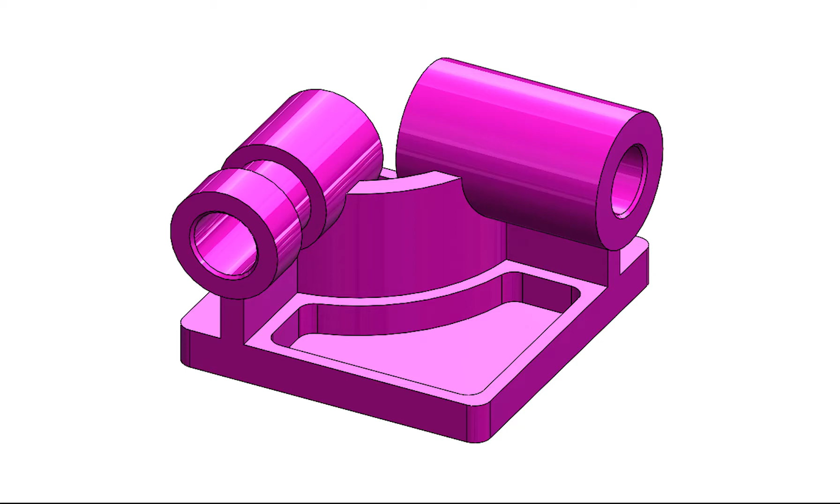Today we are going to make this part. This part is a SolidWorks CSWA exam file part. Let's try to make it and learn how to make it.

This is simply 213 from here and 200 from here. This main plate is 200 and 213, and let's start with the main plate. File new, on the top plane I will make a rectangle, center rectangle. Let's give it a dimension.

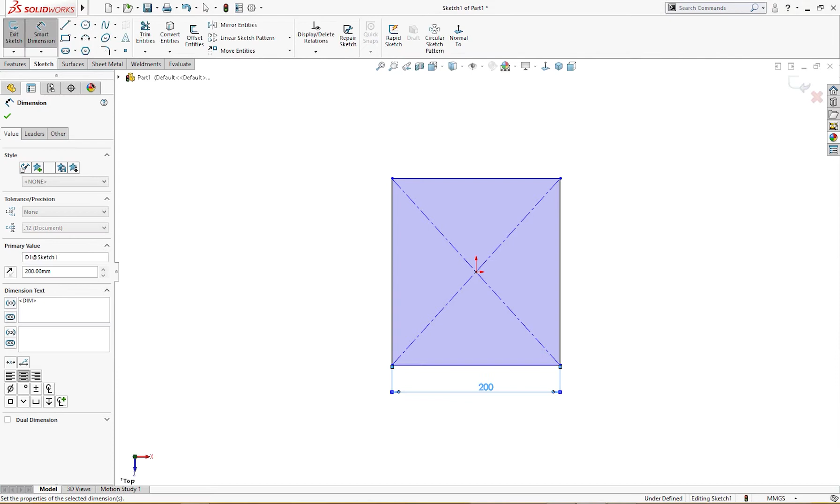The dimension is 200 and 213. 200 and 213. Extrusion is 25mm. Let's extrude it up to 25mm.

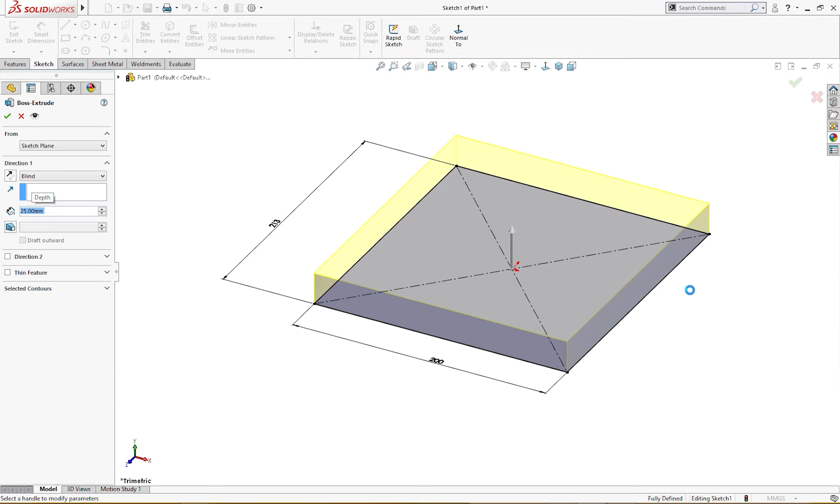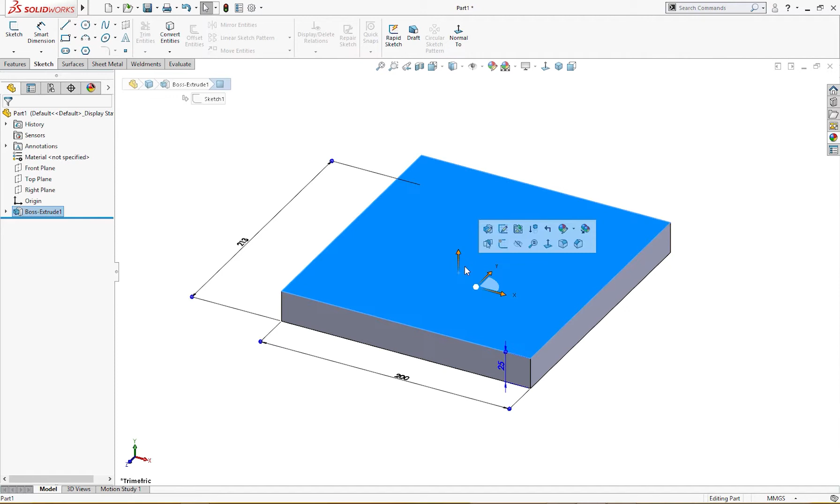Now let me remove this color first, and also the real view. It makes problem to see clearly. So now let's draw some sketch over here.

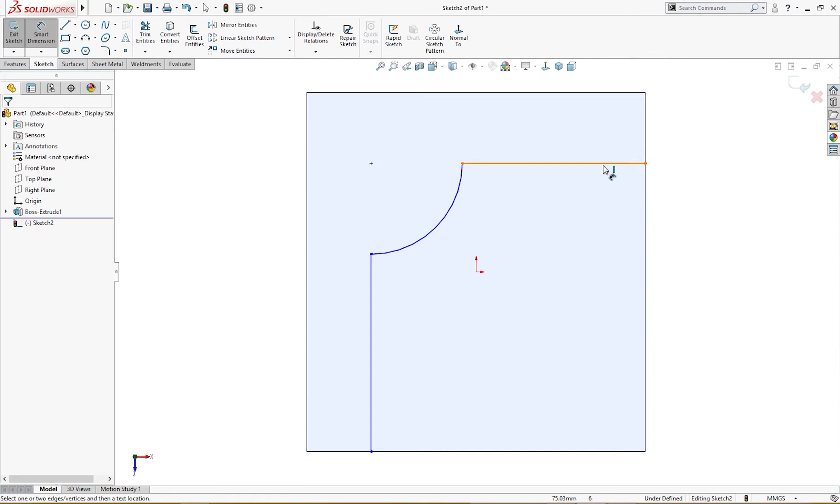I will draw a line from here and it will convert into an arc, and then I will go back there. Let's give it a dimension of 80mm and 80mm. This is 170.

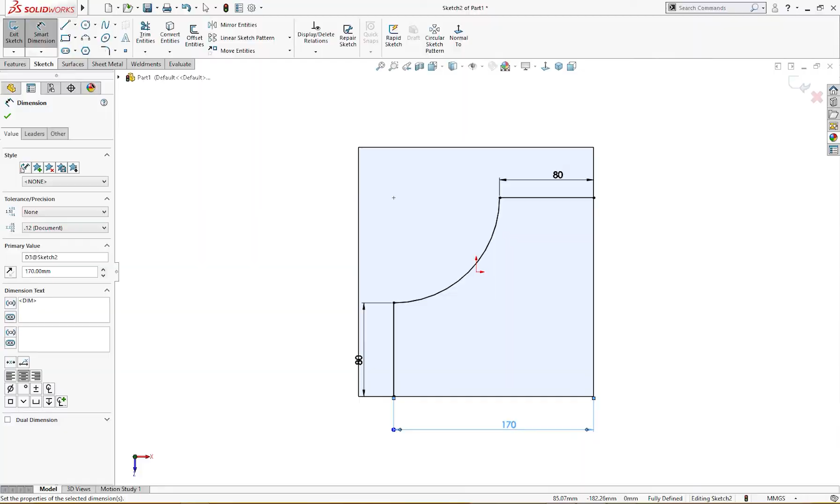The sketch is fully defined. Let's check. This is 170 and 170 from here.

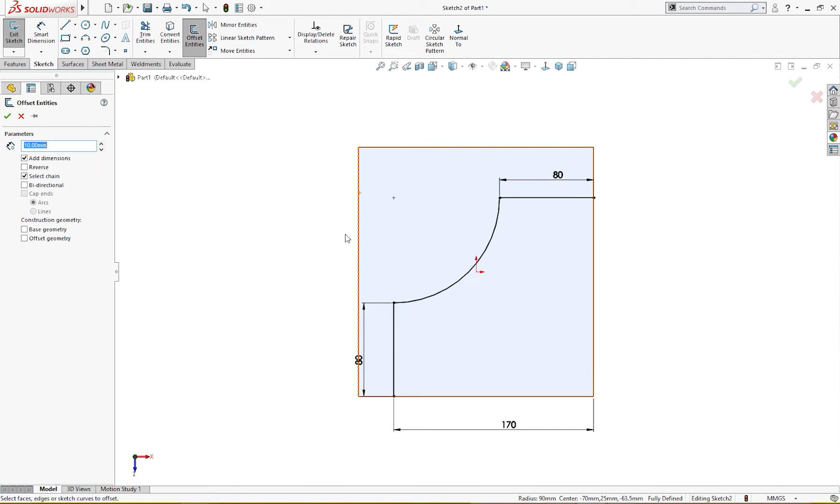I'll offset it 15mm offset. Let's offset it. Let's offset it. Offset 15mm. This is the right side.

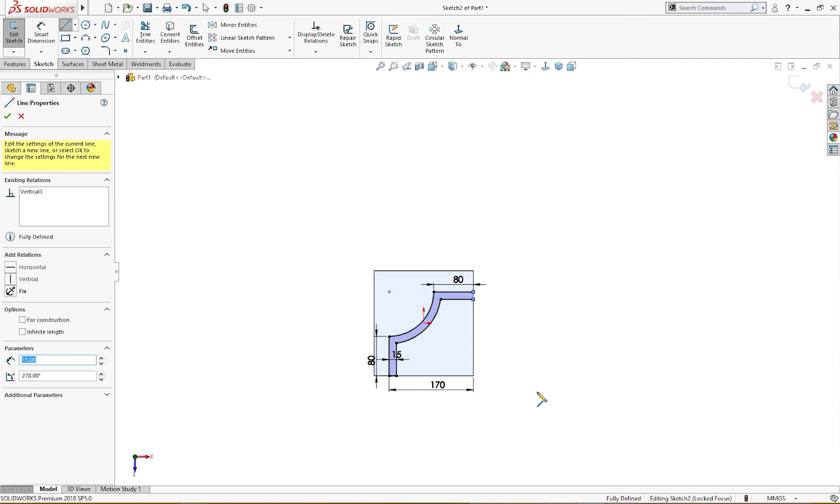Okay, let me close the boundaries from here to here and from here to here. This is defined. I will leave it like that. I won't extrude it because I know there are some changes in the future.

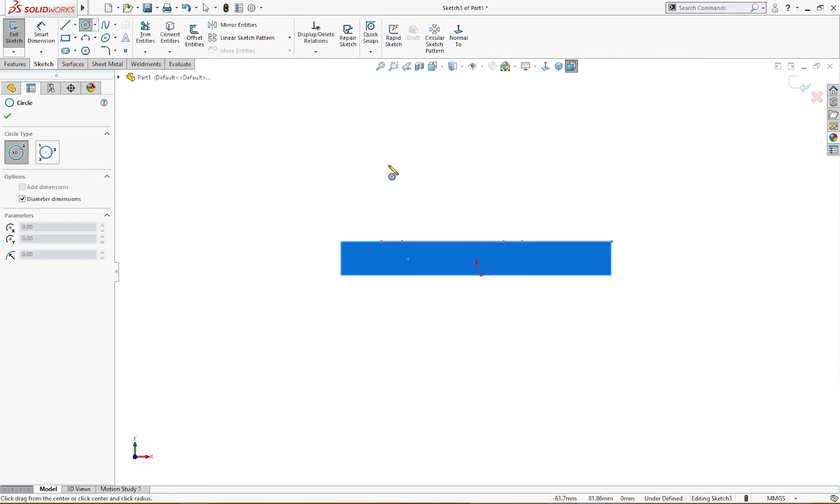So I will make on this plane a cylinder as per drawing and give it a dimension of, let's check what's the dimension. Dimension is 70mm from outside and 41 from inside. 70 and 41. Let's give it 70 first.

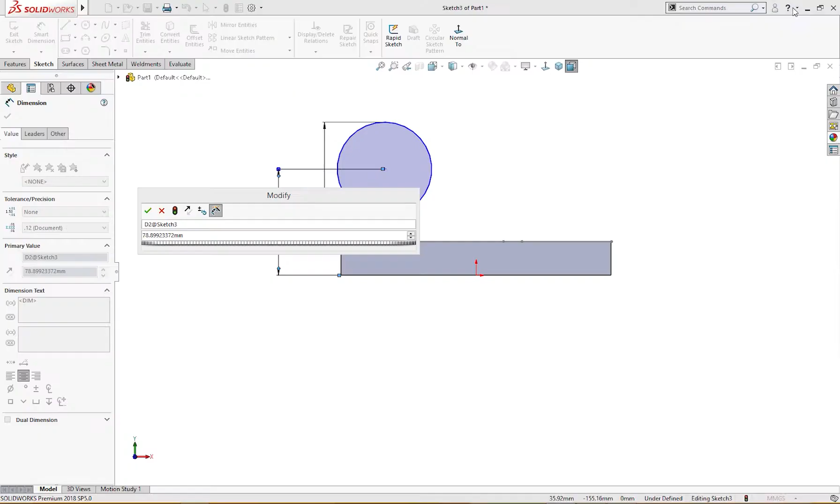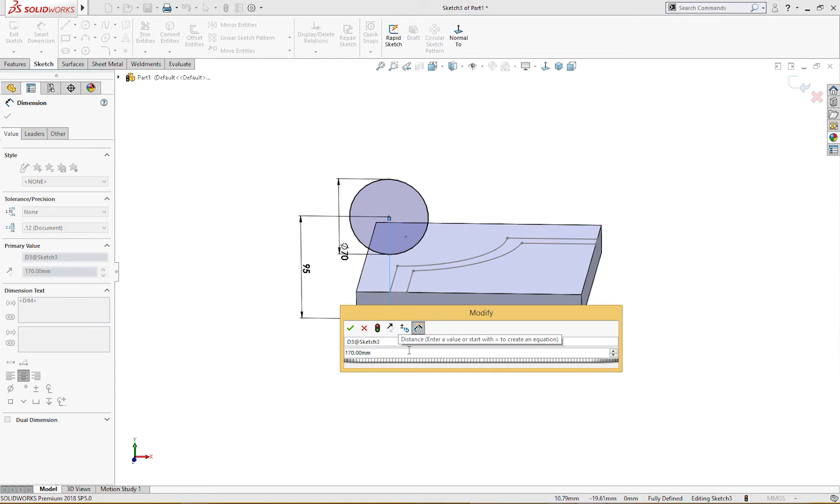This is 70, and height is from there to there, from here to here. This is 95mm. 95mm. Okay, and also from here to here is 162.5, which is 170 minus 7.5 minus 7.5, which is half of the 15 of this wall.

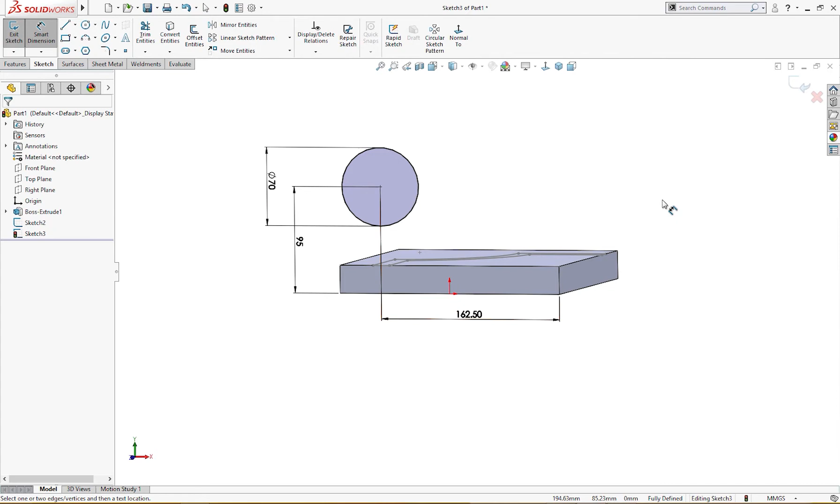I'm going to extrude it. Okay, now let's extrude this. Sketch is fully defined. Let's extrude it. 10 millimeter from here.

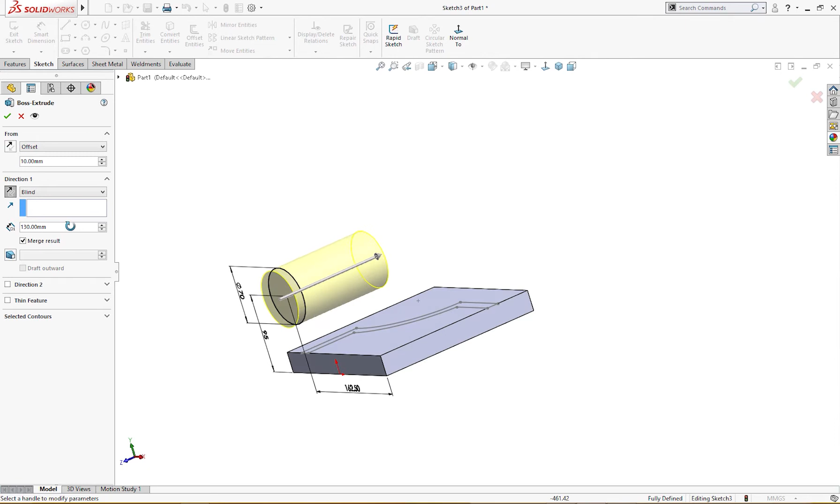I will offset 10 millimeter and 130 from this side. 10 millimeter from this wall out and 130 millimeter back side. Okay.

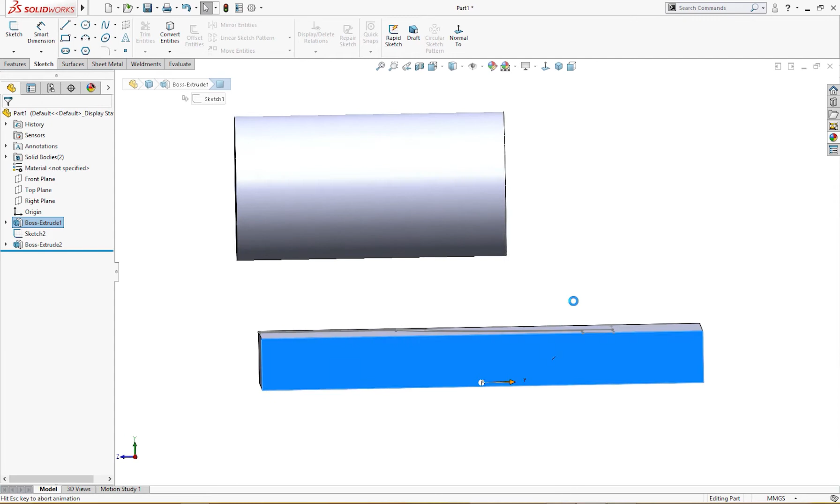I will draw another cylinder over here. I will draw another circle over here. Let's draw. This is 84, I think. This is 83 and 41. 83 millimeter. This is 83. Same distances

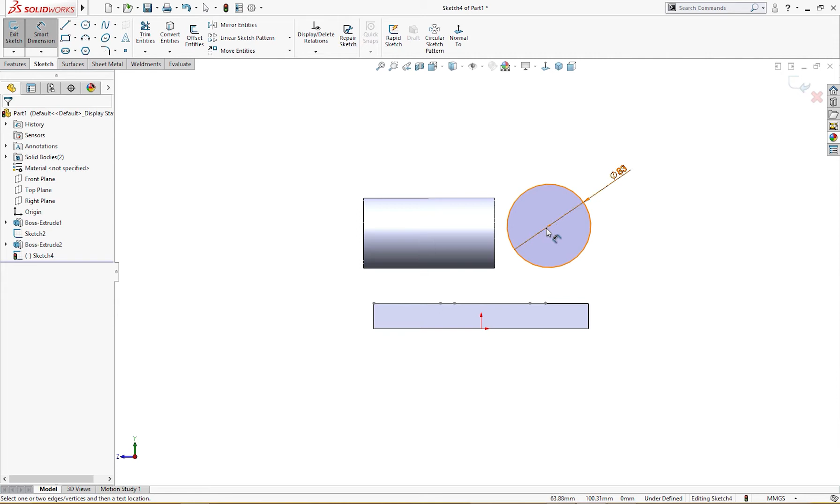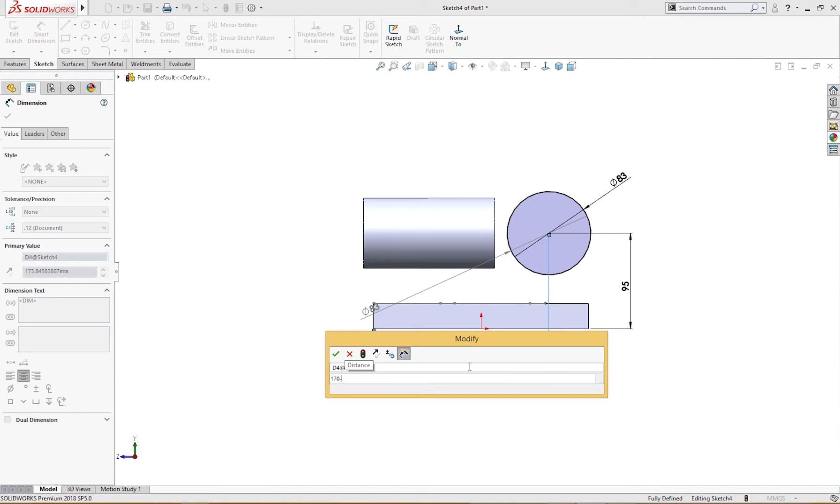from here to there is 95. Same, and same from here, from here to this point, 170 minus 7.5, the half of which is going in the center of this wall.

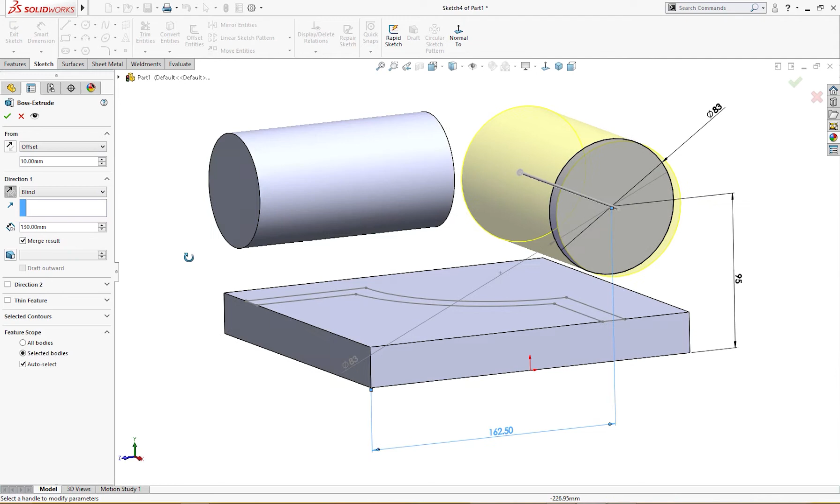Okay, I will extrude it. Sketch is fully defined. Let me extrude it. Offset 10 millimeter on the front and 130 from the back. Okay, this is 10 millimeter and 130 from back. Okay, that.

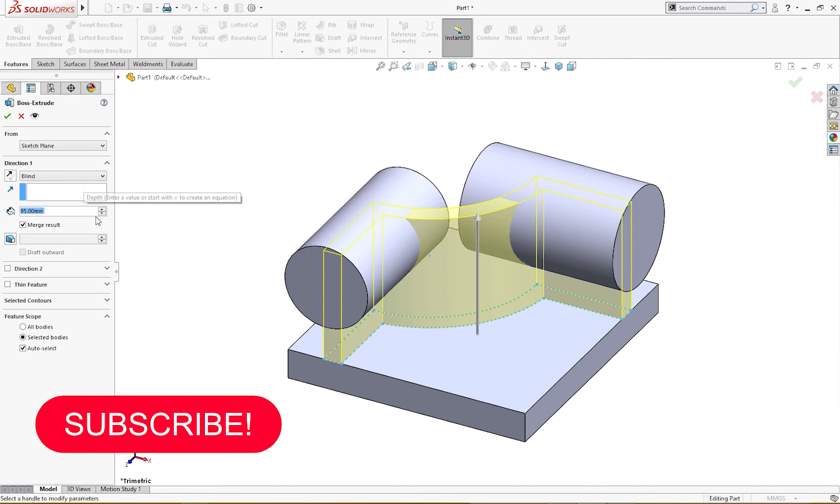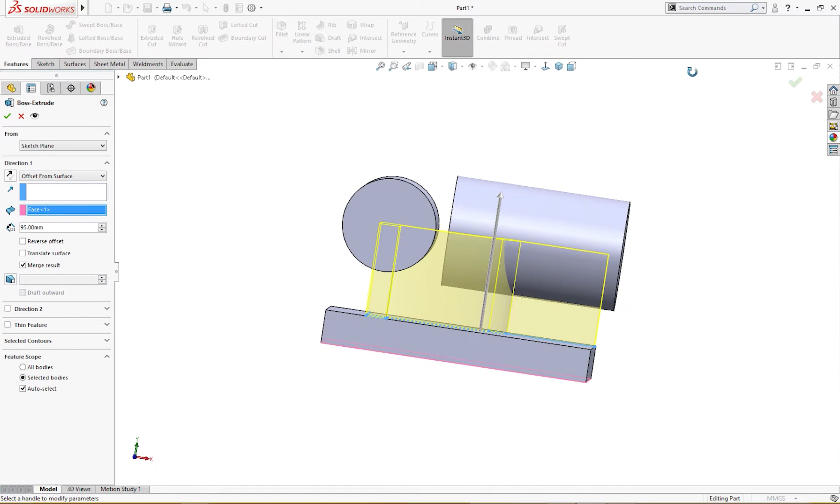Now we are ready to extrude this. Sketch, feature, extruded boss base, 95 millimeter. 95 millimeter from offset from surface, from this surface, reverse. This is 95 millimeter because in the drawing it is 95 from the base. 95 from the base. Okay, so this will come into the center of these cylinders. Okay.

Now I will draw a sketch here, from here to there, and give it a fillet of 15 millimeter. I think this is 9 millimeter offset from here. 15 millimeter. Yes, here it is. 15 millimeter. 15 millimeter radius. 15. Okay.

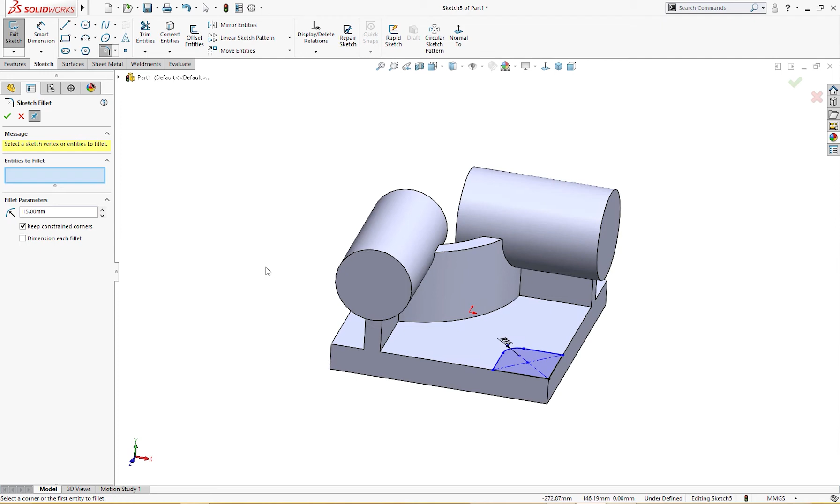I will extrude it. Let me give the dimension first. Normal. Let me give the dimensions first. This is 60 by 60. Okay, 60 from here and 60 from here. Okay, the sketch is fully defined.

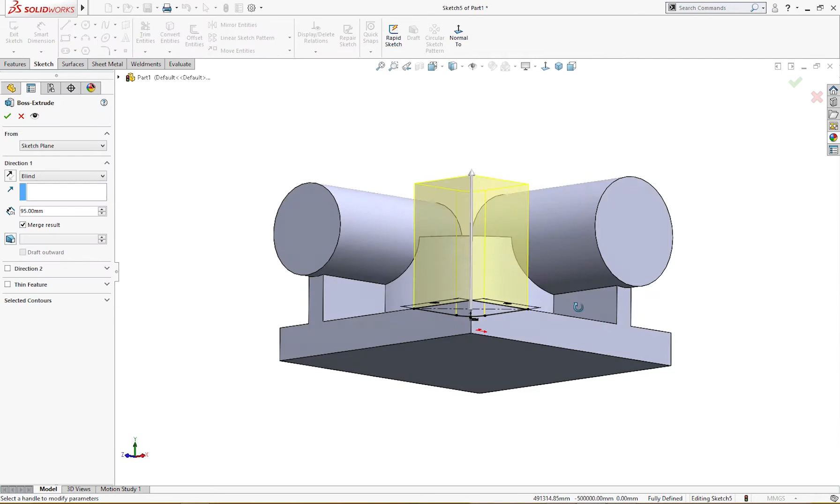Let's extrude it. I will extrude it from the base, from the surface, from this reverse direction, 35 millimeter. This is 25 and this is 35. 10 millimeter it is extruded above from this plane. Okay, as per drawing.

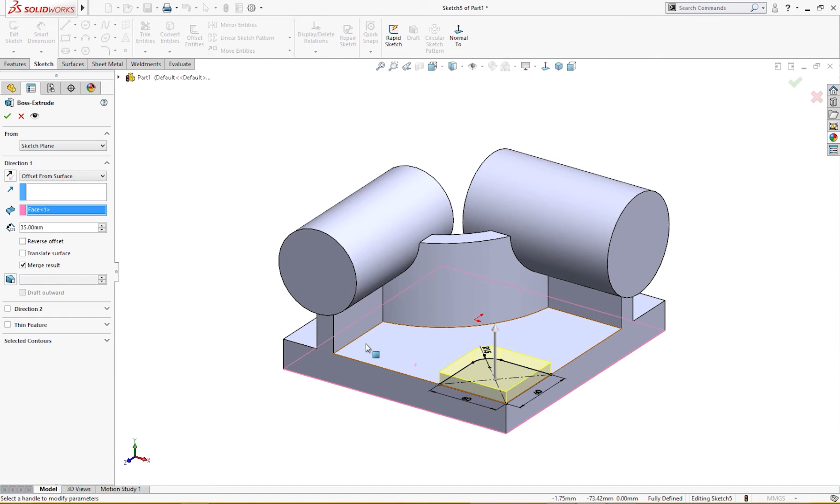Now let me make a hole here. There is a hole of, this is the hole. We can make any hole, any kind of hole, or let me check it first. Maybe it's given somewhere. No, it's not given.

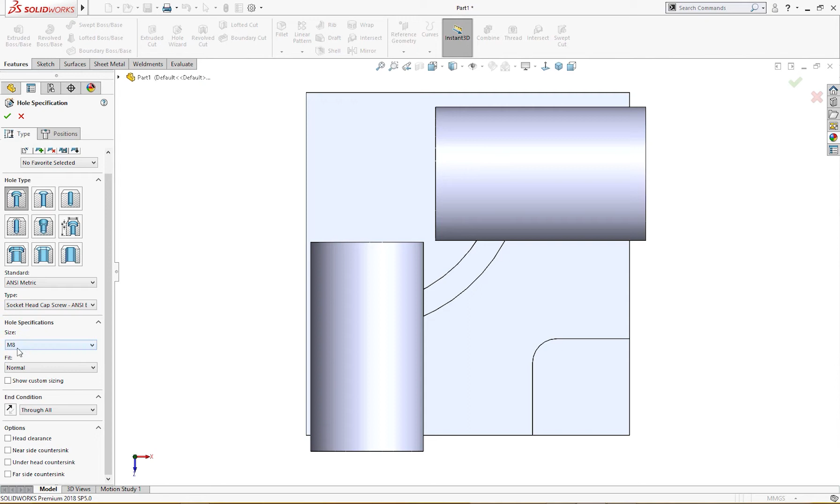Okay, let's make a hole of 8 millimeter normal, through all, socket head cap screw, M8 normal, position

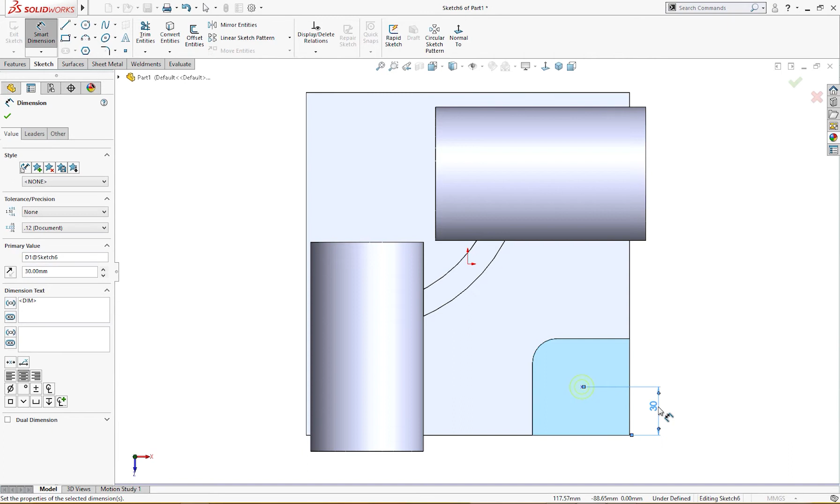here, its position is 30 and 30, is in the middle, 30 from here, 30 and 30. Okay, let's OK it. The hole is created.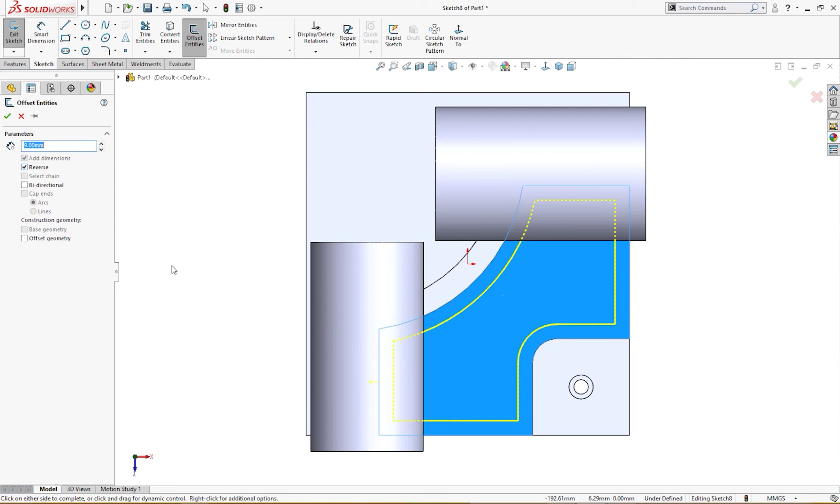Now let's offset entities. Let's offset features. I will draw a sketch over here and offset it. Offset 9 millimeter. Reverse. Okay. The sketch is fully defined. I will fillet it later.

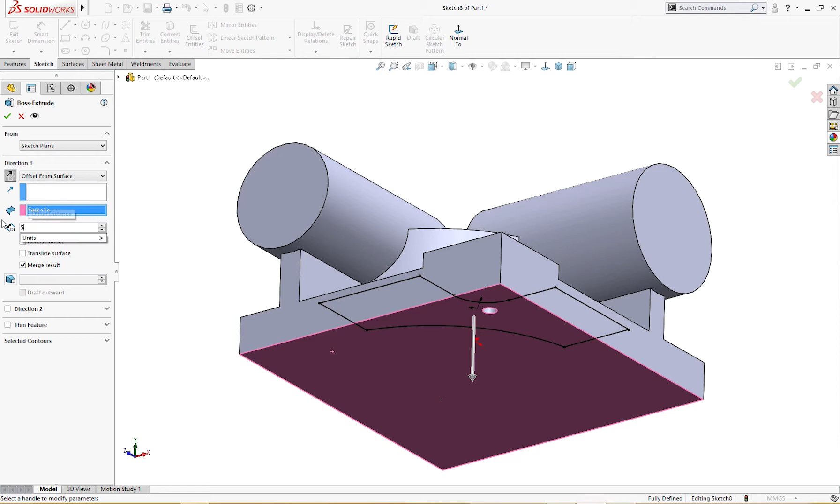Let's cut it. It is 20 millimeter deep, but it is 5 millimeter from the base. I will take it for offset from this and 5 millimeter and reverse direction.

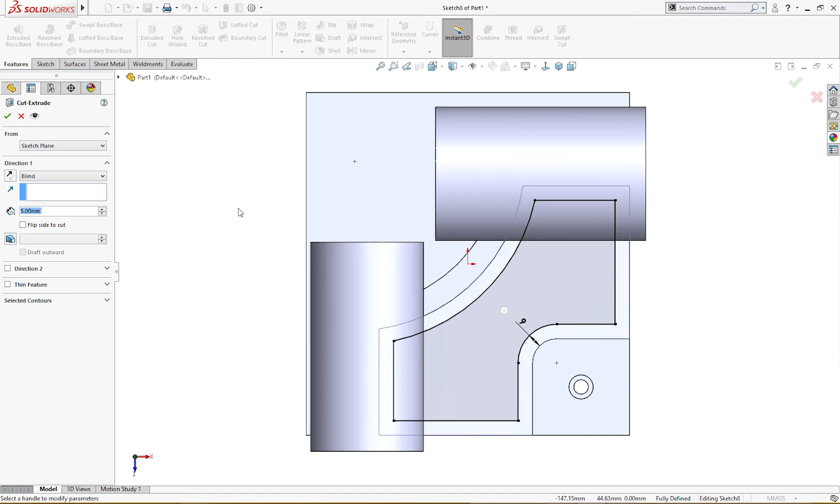Offset from surface 5 millimeter. Okay. Not extrude, sorry, I extruded it. I have to sketch. I go to features. I'll cut extrude, sorry. Cut extrude from this surface, offset from this surface 25 millimeter. Okay.

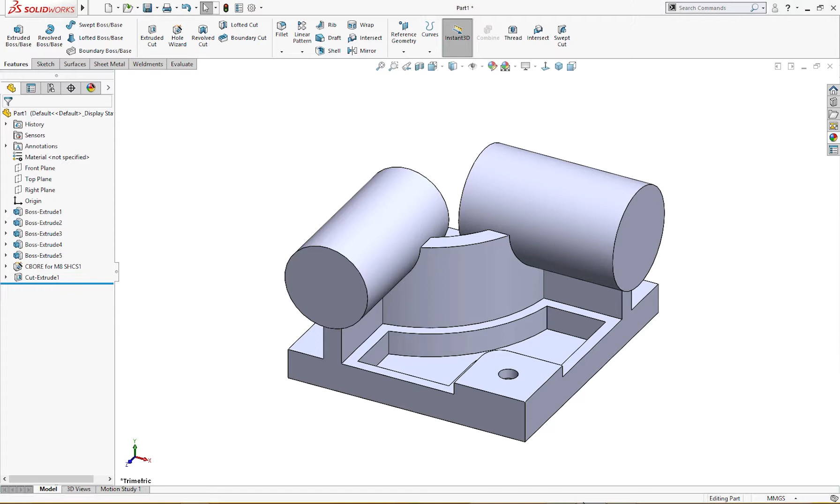Let me give a fillet of... where is the fillet? R10, 10 millimeter radius fillet. Fillet. Okay, I'll select all these and 10 millimeter. Okay, this is complete.

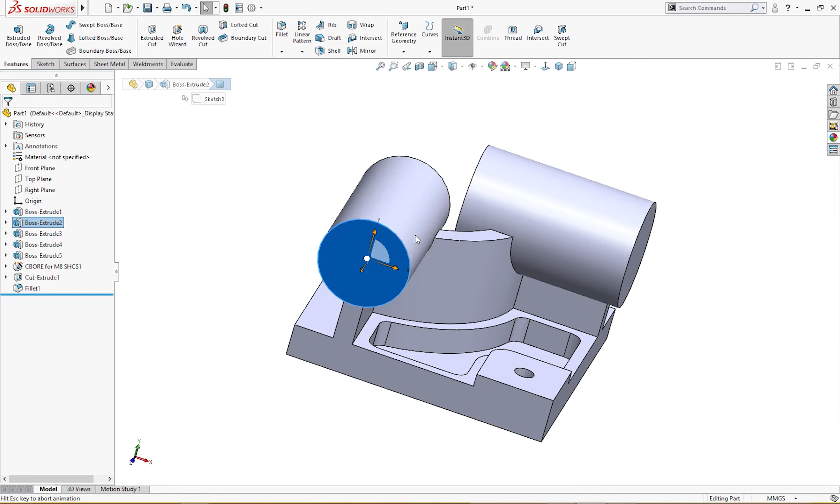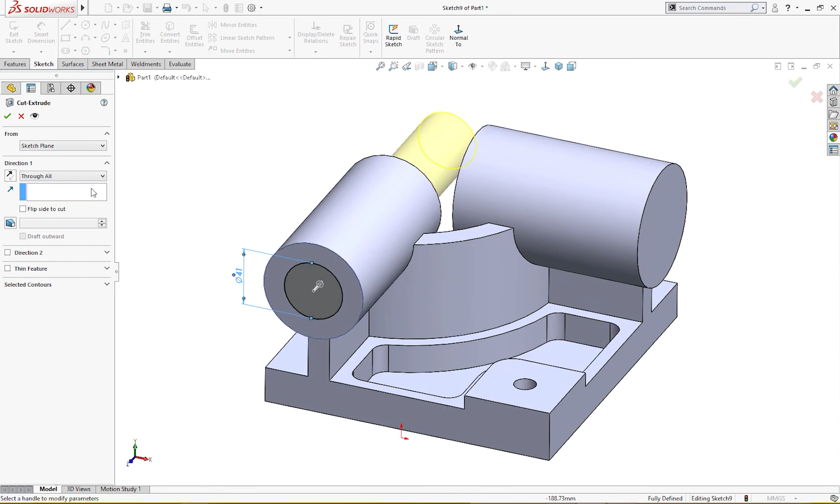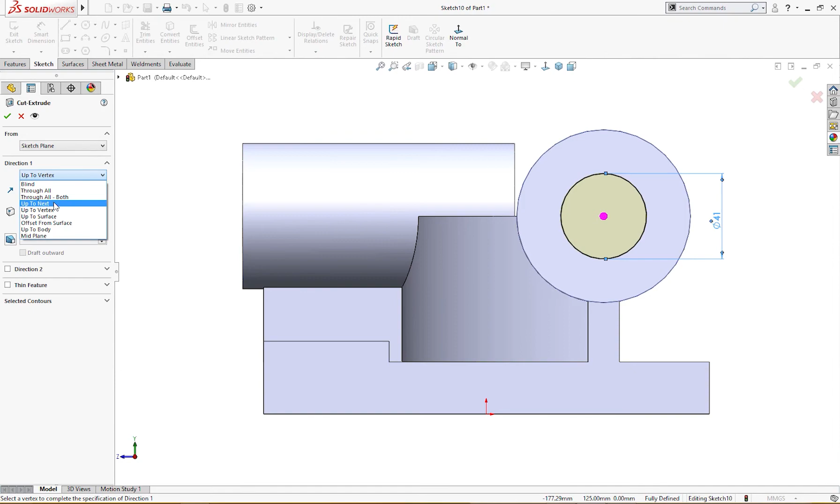Now let's make some holes here of 41 millimeter. Through hole, extruded cut through hole. Okay, and now over here I have to make another cut, another hole of 41 millimeter as per drawing, 41 millimeter, and extruded cut through all or up to next, or through all is better. Okay.

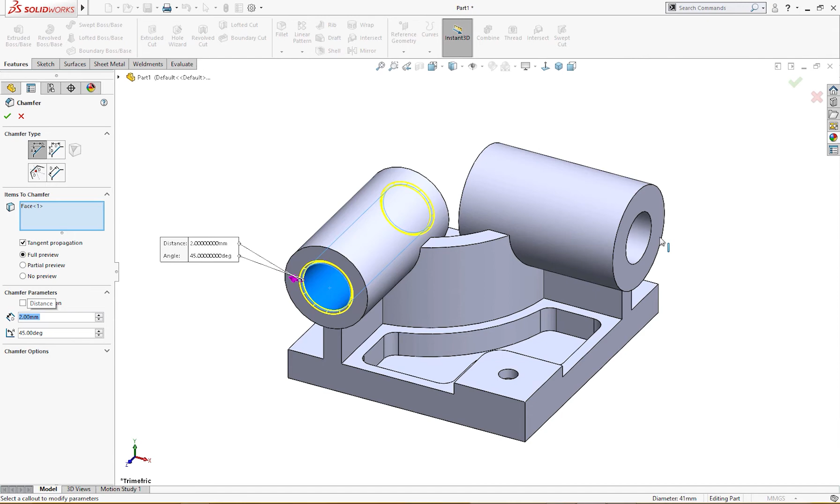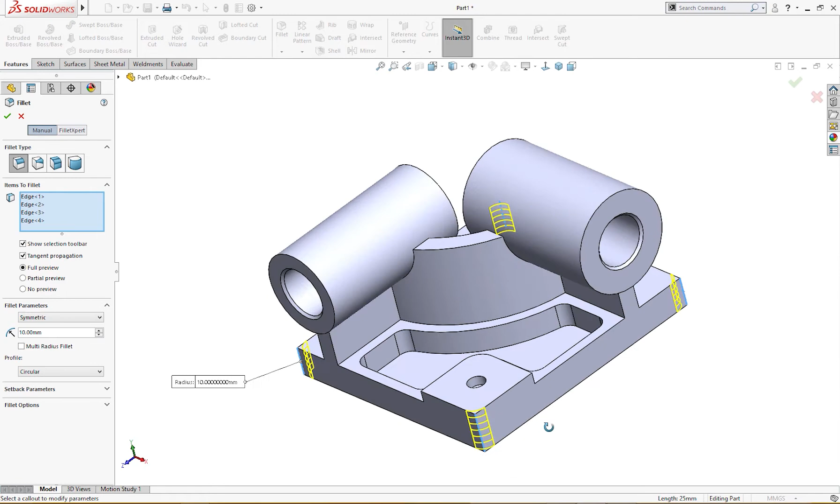There is some chamfer, I think, here. Chamfer of this is 2 millimeter chamfer of 45 degree. Let's chamfer it here, 2 millimeter here and in this hole. Okay, now the part is complete, only the fillets are left. I will give the fillets of 10 millimeter. This suits me, it's okay. 10 millimeter fillets. The part is complete.

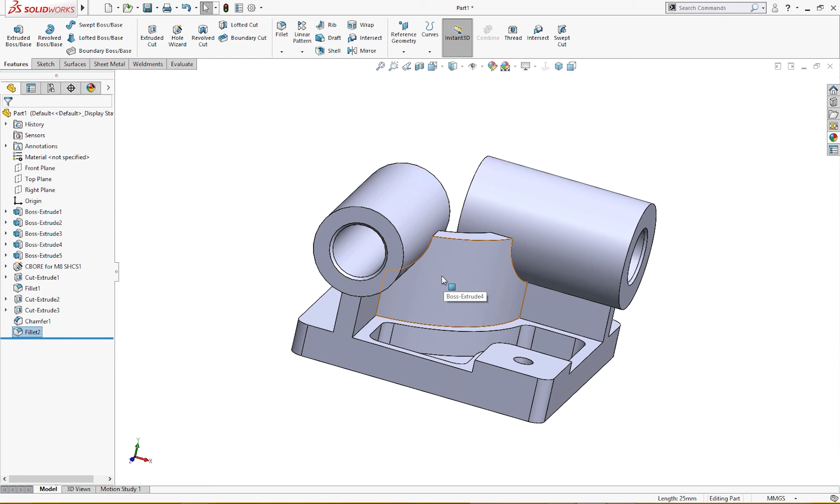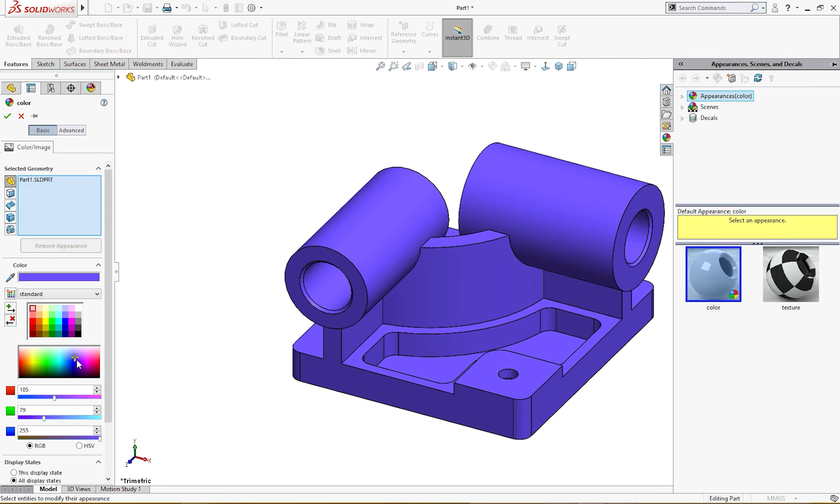Now comes the change in this part. There is a cut here. I have to make a cut here, so that's why I made the cylinders first and extruded this wall later. So let me give it a color first. Let me give it a color of something like that. This is not good. That is better, I think. This is as per drawing. The color is as per drawing also. Okay. Now comes the change.

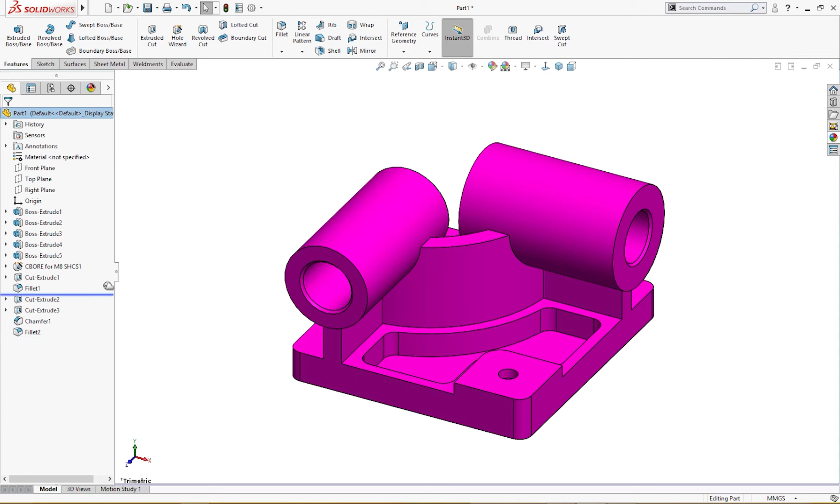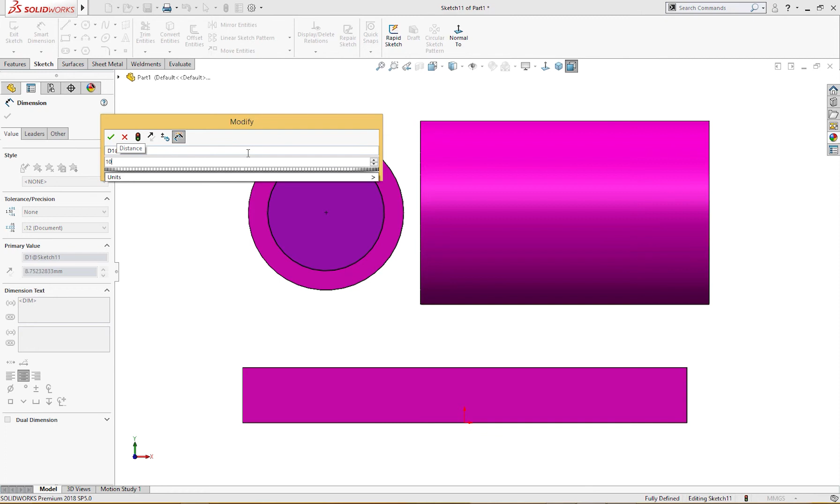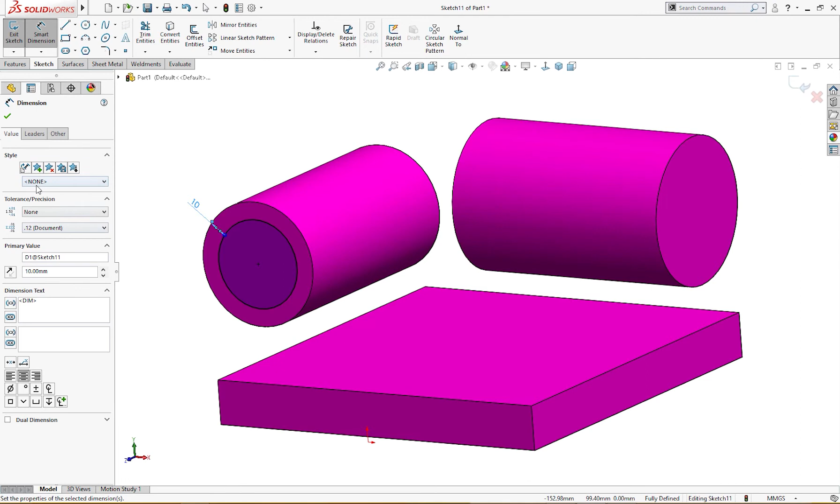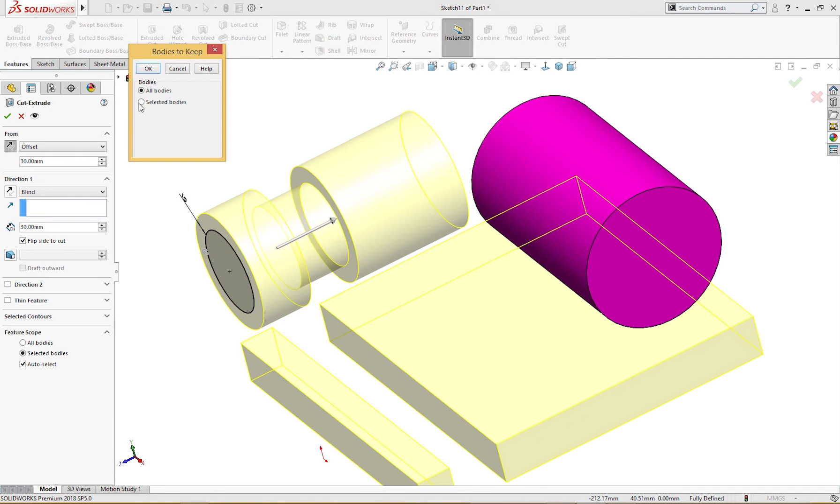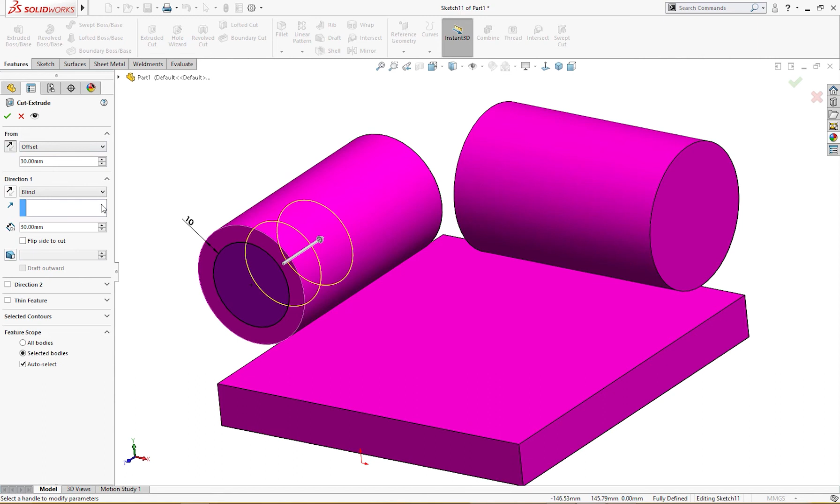Let's cut it. Cut extrude, flip side to cut, 30 millimeter and offset 30 millimeter, reverse direction. Okay, this looks okay. Okay, so, excuse me, Control Z. Let me cut it again. 30 millimeter, offset 30 millimeter, reverse direction. Okay.

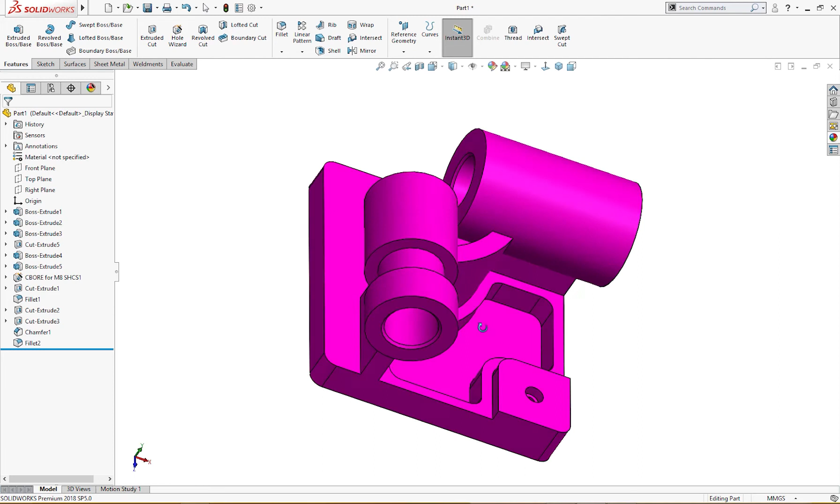Cut extrude, flip side to cut. Okay, this is the cut we were looking for. Everything will remain the same. There is no problem here with the wall. That's why I made this first and extruded the walls later. Only one thing is left. In this next drawing there is no such thing like this extrusion here, so I will suppress it.

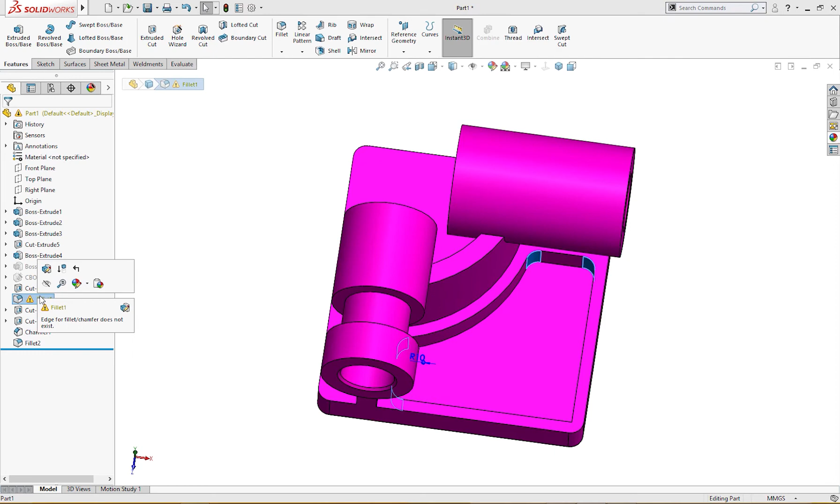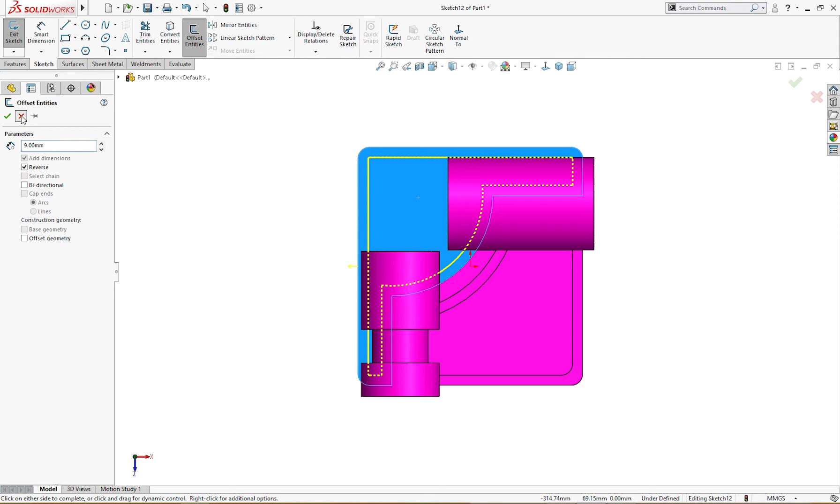Continue. Okay, there is a fillet problem. I'll go to fillet and repair the fillet like so. Okay, yes, and there is also a depression here, so let's draw an offset. Reverse. 9 millimeter is okay. Add dimension, select chain. It's not chain. I have to select it one by one, so offset. I don't know why it is getting all this. Anyway, it's not a problem. Okay.

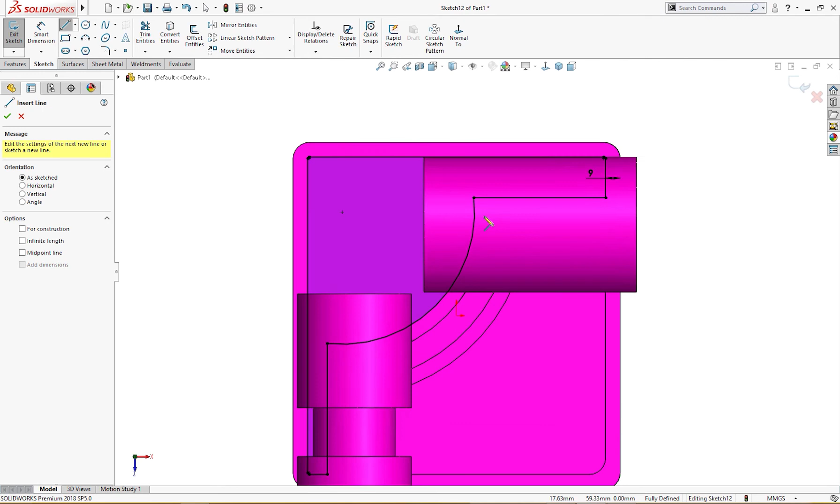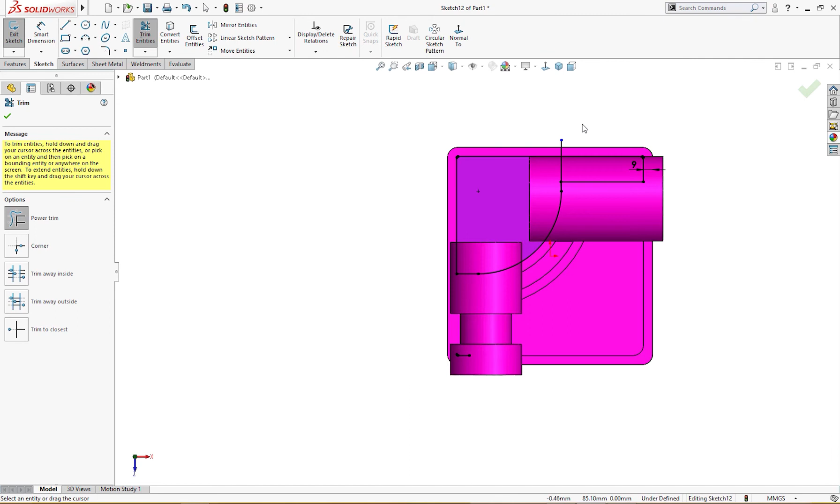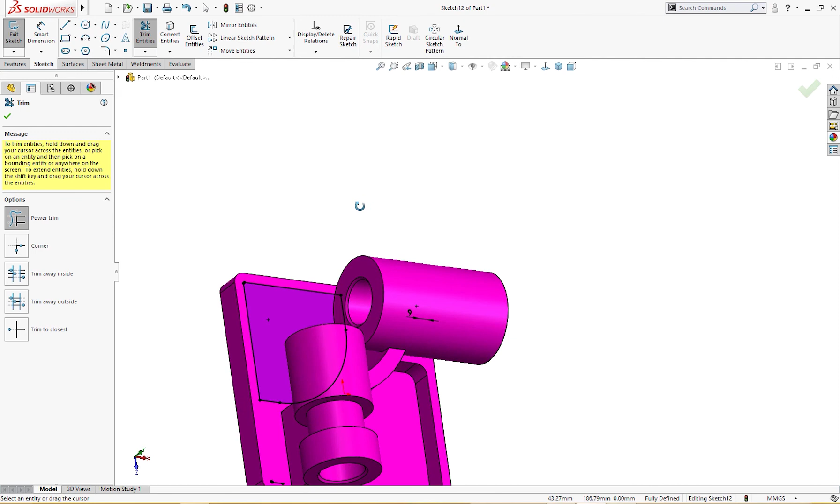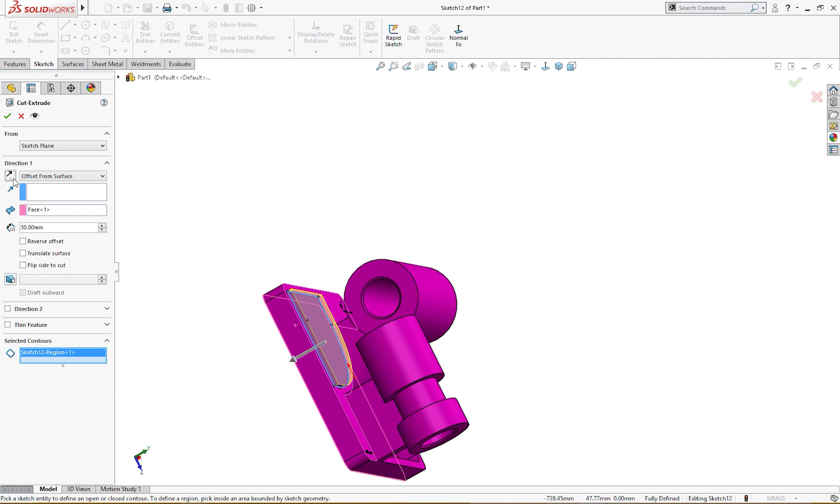Normal to. I will draw a line from the quadrant to there and from the quadrant there. I will trim it. I will trim all these things, this, that and this, and also these two and this and this. Okay, this is also 20 millimeter deep, 5 from the bottom. Let's cut it. Offset from surface, reverse direction, select the contour, this contour, reverse direction, 5 millimeter. Okay, this is okay.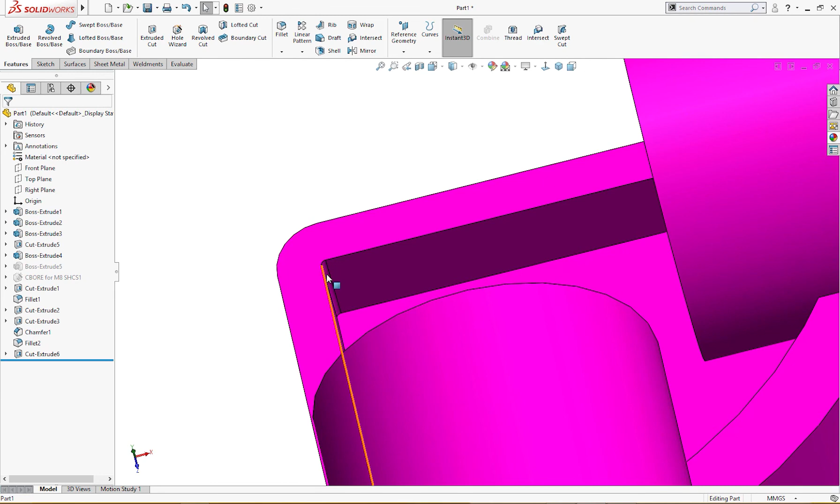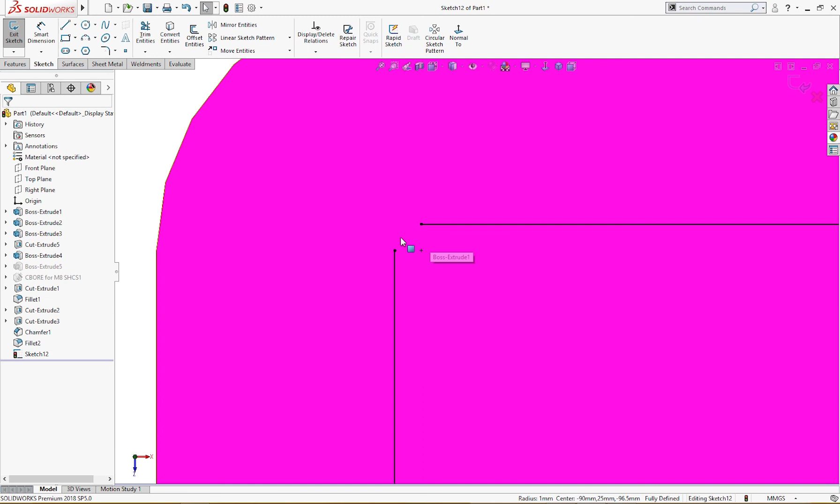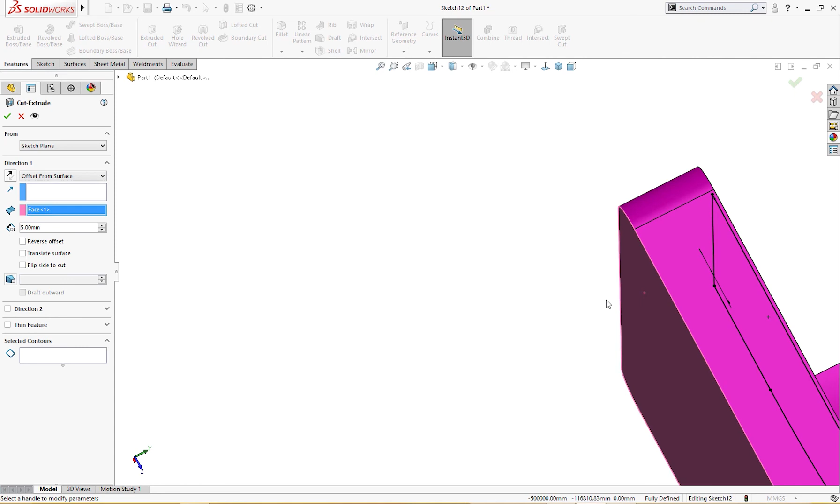Now all that is left is to give the fillets of 10 millimeter here. Sorry, there was a problem. I should have done the cut extrude later. I will delete this and repair the sketch first. There is a problem. I will delete this and use trim entities, extend these and trim. Now we are ready to cut it. Cut extrude, offset from surface, this, and the selected contour is this. This is okay. Now it's okay.

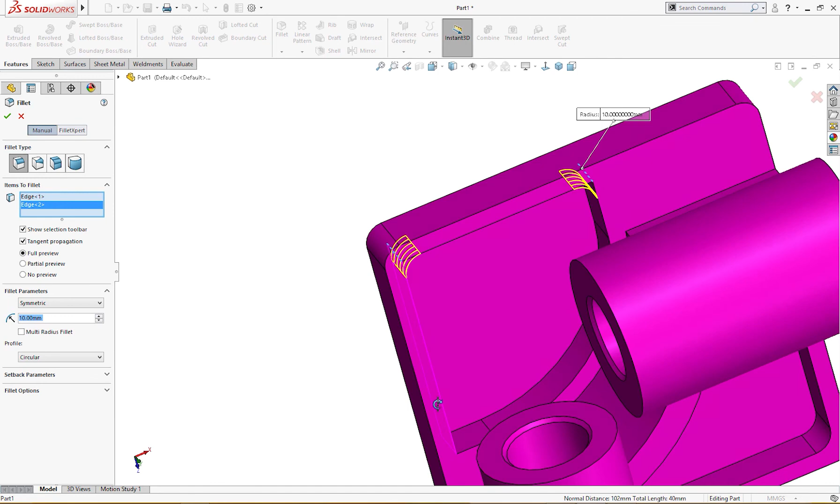Let's fillet it. 10 millimeter and this. Okay, now the part is complete. The second change is complete. So this is a very simple exercise. It is a SolidWorks Associate Exam file. You can practice it and do the exam.